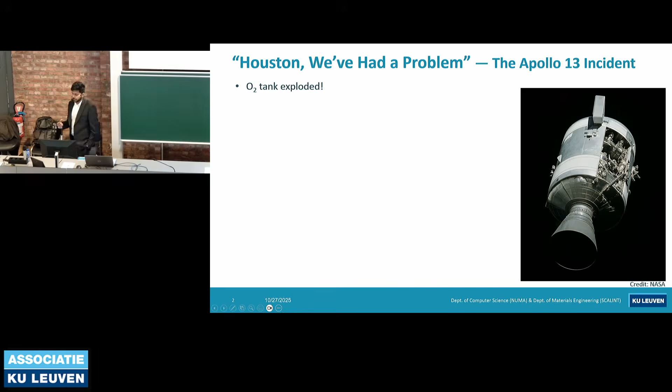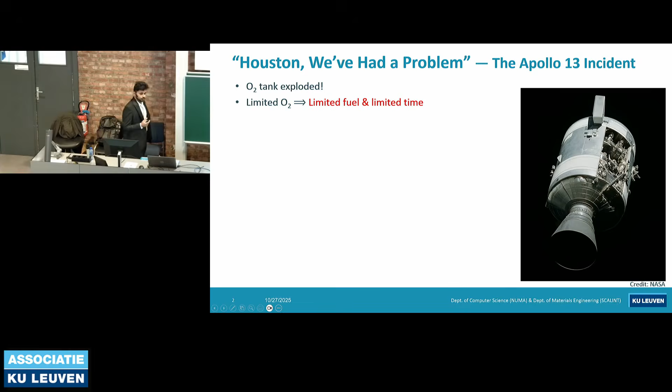You might be thinking that oxygen is quite important in the spacecraft for breathing, but in this case, it was used for breathing as well as to fuel the fuel cells which powered the electrical systems. So in no time, the spaceship, which was almost preparing its landing on the lunar surface, was now a stranded, damaged vehicle in space with limited oxygen, which meant limited fuel and also limited time. The astronauts had to carefully choose a maneuver so that they could abort the mission and go back to Earth. And they had to do it very judiciously because they had limited resources.

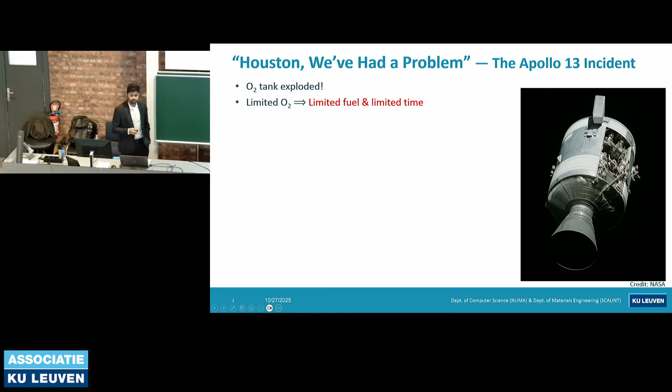With these simulators, they tried different scenarios and figured out a good maneuver that the astronauts could use to successfully get back to the orbit of the Earth and then come back home safely. What NASA did back then was quite remarkable. It was also one of the most significant demonstrations of what we nowadays call digital twins. While the term digital twin did not exist when this incident happened, the idea was already there.

The three key components we can identify there are the spacecraft, which forms the real system, the simulators on Earth, which form the virtual replica, and the continuous communication between mission control and the spacecraft through telemetry. So we also try to apply the same concept, but in a different context. Not to bring stranded astronauts home, but to understand and model material behavior.

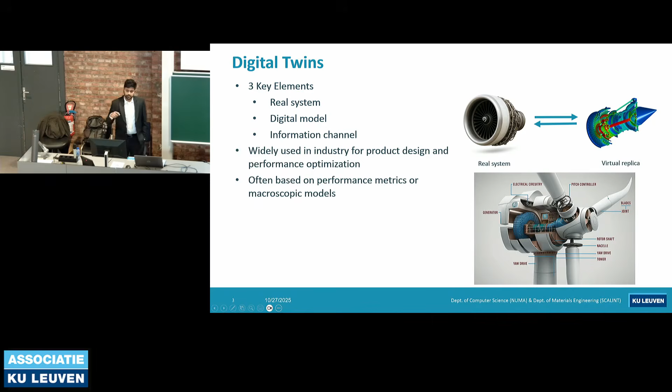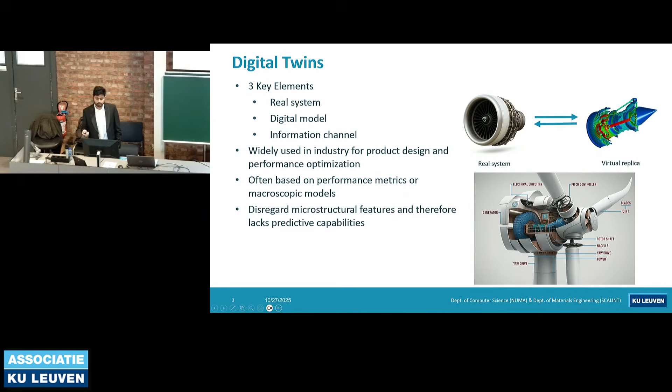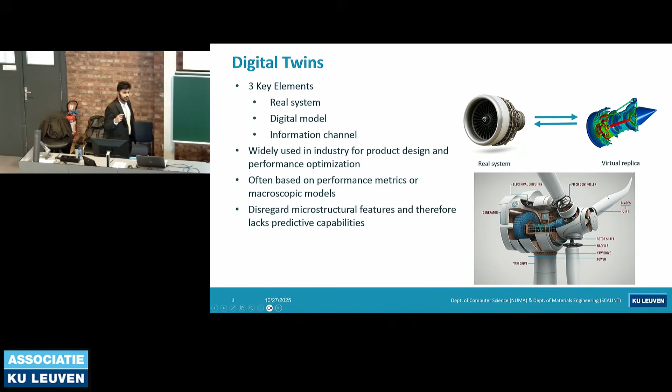Digital twins can also be used as a complement to experimental data. They cannot replace it, but they can act as a complement. So digital twins are quite important, but there is a problem here. These digital twins are usually based on macroscopic models or on performance metrics, which are quite empirical. They often disregard microstructural features, and because of that, they lack predictive capabilities. My thesis aims to include mesoscale modeling strategies in multi-scale simulation so that the hierarchical nature of material is captured in these digital twins.

What I mean by the hierarchical nature of material behavior is: let's consider a turbine system, which is a system of maybe thousands of components. If we isolate one component, such as a turbine blade, it is made up of several substructural, microstructural features. Instead of further zooming in, let's take the other way around. We all learned that matter is fundamentally made up of atoms. Atoms have a nucleus and an electron cloud revolving around it. In crystalline matter, these atoms don't sit at random locations, but organize in a very structured way.

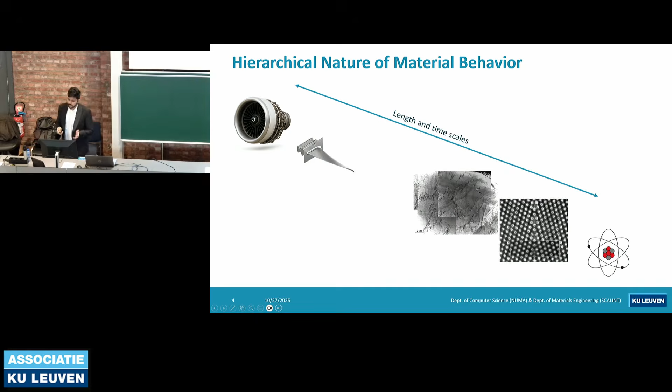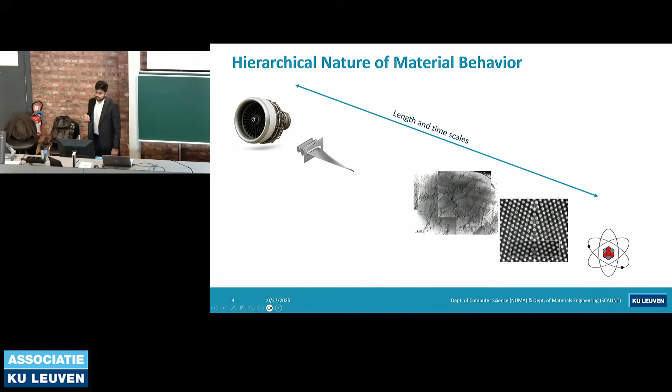For example, if you have a molten metal and you solidify it, these atoms start stacking together in an organized way at a nucleation point. The condition at one nucleation point is different from another, which is why you can see a boundary here between the two crystals. These are called grain boundaries, and the regions between grain boundaries are grains. The stacking of atoms is usually not flawless, which is why you have defects. These defects, especially dislocations at microscale, form the fundamental mechanism of deformation. If these defects were not present, metals would not deform but simply shatter like glass.

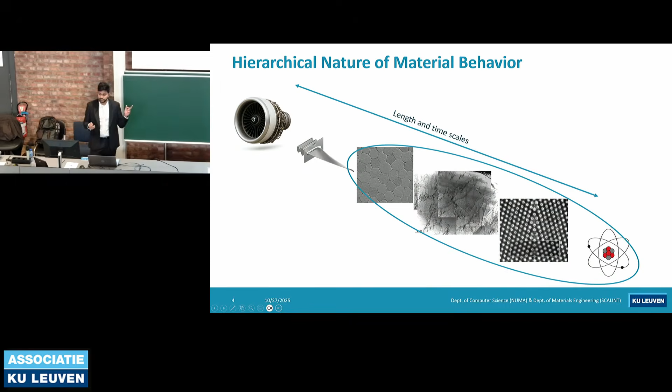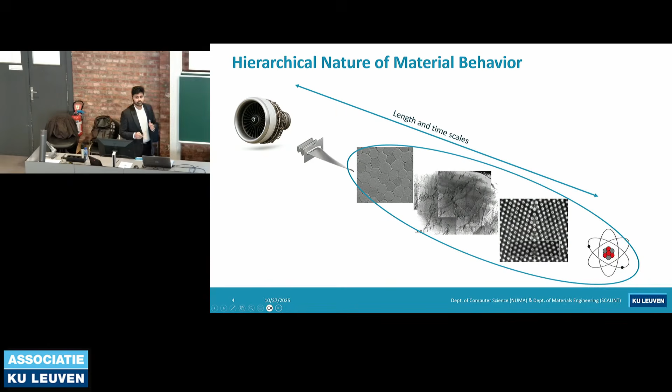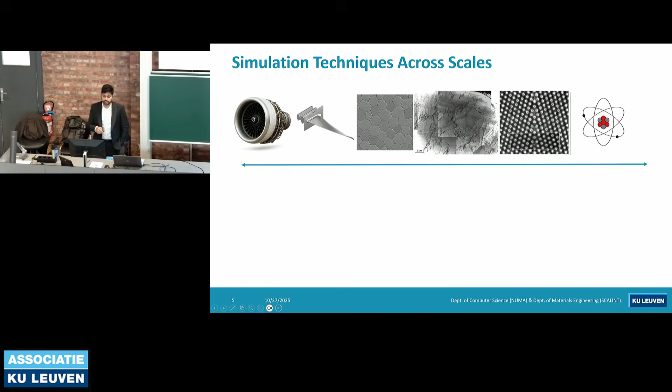These individual grains together form the polycrystalline structure of a turbine blade that you can see here. So when we speak about the mechanical properties of a turbine blade, we are actually referring to the incredible hierarchy of microstructural features that we see here. Since different features are seen at different scales, different simulation techniques are involved to simulate their effects. At macro scale, you have multi-body dynamic simulation, which considers the connection between different components. For a single component, we have macroscopic plasticity simulations, based on yield functions and plasticity theories.

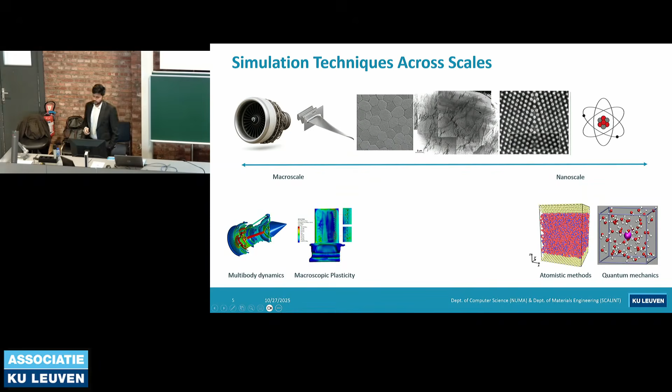On the other end, where the electronic structure of the material is considered, we have quantum mechanics simulations, then Newtonian mechanics, which do not consider the electronic structure, and discrete dislocation dynamics simulation at microscale, which only considers dislocations and their impact on hardening. Clearly, the simulation techniques on this end are quite practically applicable, and they can reproduce the realistic boundary conditions seen at a component level. But they lack predictive capabilities because they ignore the microstructural features.

The simulations on this end are quite physically grounded, so they are quite accurate, but they struggle to extend to larger volumes or be practically applicable. What comes nicely and ideally in between here is mesoscale. Mesoscale simulations act as a bridge between the macro scale and micro scale. They try to capture the physical detail from the lower-end simulations and also be practically applicable for macro scale simulations. In this family of simulations for material deformation, crystal plasticity is one of the important simulation techniques.

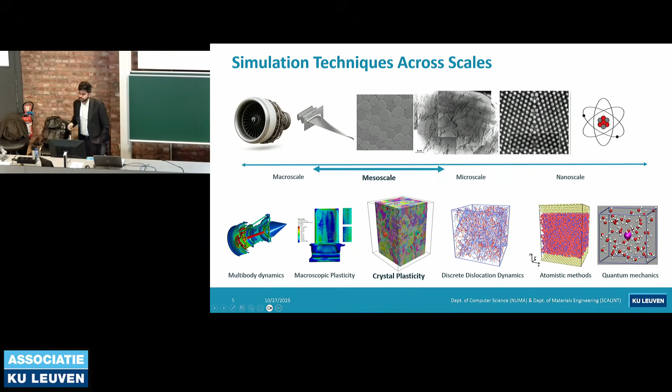So as I said, mesoscale connects macro and micro worlds, and it also acts as a perfect middle ground, but it also comes with many challenges. So it not just inherits the best of both worlds, but also the worst.

I'll explain why. Because at very small scale, you have first principle simulations, which are physically quite grounded, but to set up a simulation, you need a very small number of input parameters, such as fundamental parameters like atomic mass, electronic structure, etc. Similarly, on the higher scale, you have homogenized macroscale models which use a yield function. There again, it's quite empirical, but the number of parameters required to set up these simulations is quite small as

well. But the problem is, since mesoscale acts as scale bridging, the number of parameters required to set up these simulations is quite high. And because the number of parameters to describe the material is quite high, it's challenging to identify them from the simulations, and also challenging to calibrate these parameters uniquely. So with so much promise, the challenges at the mesoscale are also quite high. And this is exactly what my thesis tries to address.

So the aim of this thesis is to assess and refine the currently existing micromechanical modeling strategies in order to enable high fidelity digital twins of polycrystalline materials. So in very simple words, the goal is to make our simulations behave more like the materials themselves. And since the overarching objective is quite general, it is made operational by formulating research questions which are actionable, and these are based on targeted test cases.

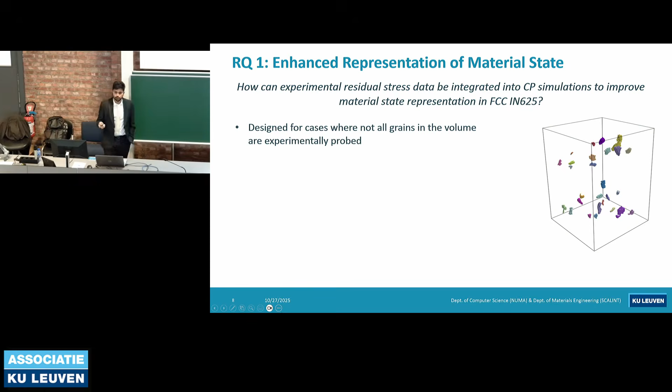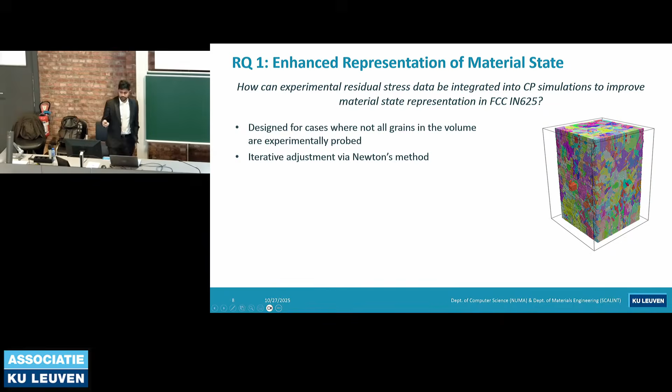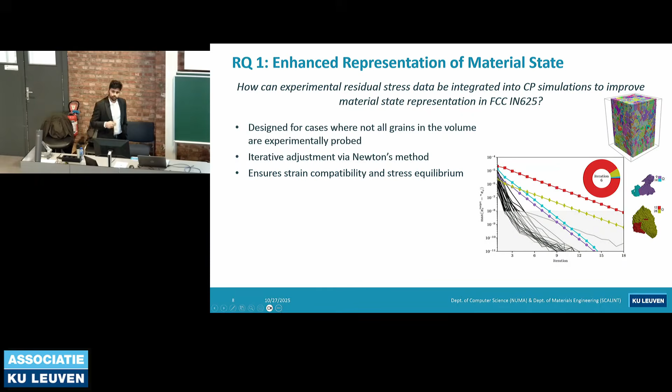A microstructure that was characterized from experiment was used, and this method is designed particularly for the case where you only have residual stress data for a small subset of grains. But this doesn't stop it from being used where the entire volume is characterized for residual stresses. The initialization of residual stresses was made in the volume iteratively through Newton's method. As you can see here, the error on the y-axis decreases as the number of iterations increases, which shows that the residual stresses converge to the reference value that we provide. This method also ensures strain compatibility and stress equilibrium, and also captures intragranular variation of stress and strain.

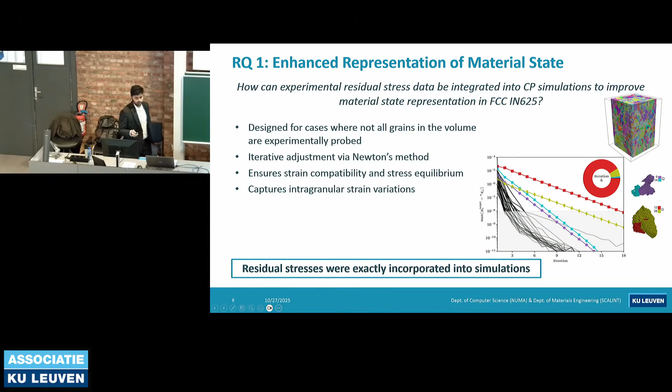So in conclusion, this method helps us to initialize residual stresses extracted from the experiment exactly into the simulations. Through this, it helps to improve the physical realism of our models.

Next, again drawing a parallel to the first story, when they got to know that the spacecraft was damaged, they used these two simulators that you previously saw in the picture. But these were not the only two simulators ever built by them. Even before the launch, they had built many different simulators which differ from each other in complexity and the level of detail that they captured. They tested all the simulators, got to know the strengths and weaknesses, and then decided based on application which simulator is best, and these were considered the final ones.

Similarly, in modeling, we have a myriad of constitutive models, also differing in the level of detail that they capture. But there's a trade-off between the level of physical detail that you need and the operational efficiency of the model. Typically when experimental data is scarce, operational efficiency becomes quite important. So this question addresses assessment of these constitutive models and asks how do different crystal plasticity models compare in reproducing mesoscale responses when benchmarked against experimental data.

For this, I used two types of crystal plasticity model. One, dislocation density based, which is a physics based model that captures detail of the dislocation structure, and the other one being a phenomenological model.

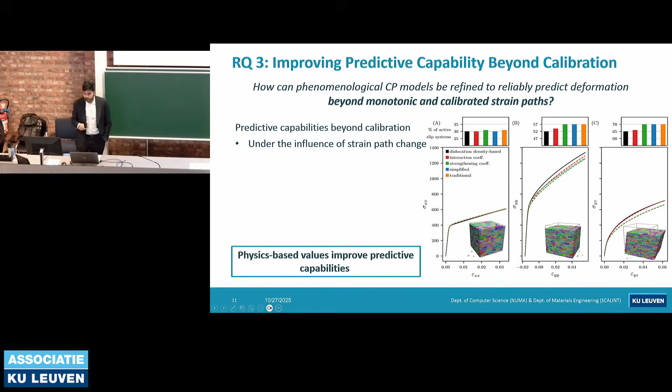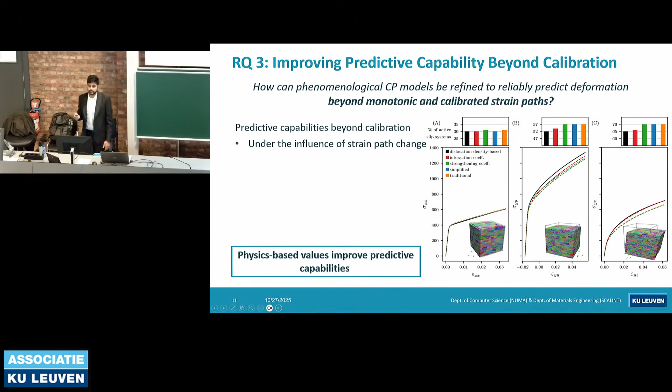Now, activating even more slip systems with the help of a shear loading cascaded on this. Here we activate about 65% of the total active slip systems, and here we also see that the interaction coefficient yields better response in comparison to the traditional. So we compared it against multiple fronts, one within the data domain of calibration and even outside, and we saw that the physics-based parameterization with the values obtained from lower scale simulations yields better results and therefore also demonstrates predictive capabilities.

Next, multi-level calibration. So here the question was how to reliably identify material parameters for a complex deformation system such as hexagonal close-packed titanium, not just with the help of macro or mesoscale, but with the help of macro and mesoscale data. Since mesoscale models try to act as a bridge between macro and micro worlds, for the calibration you need data not just from one side, but from both sides. So here we have a multi-level calibration, which is across the scale. I want to just show you why this is important.

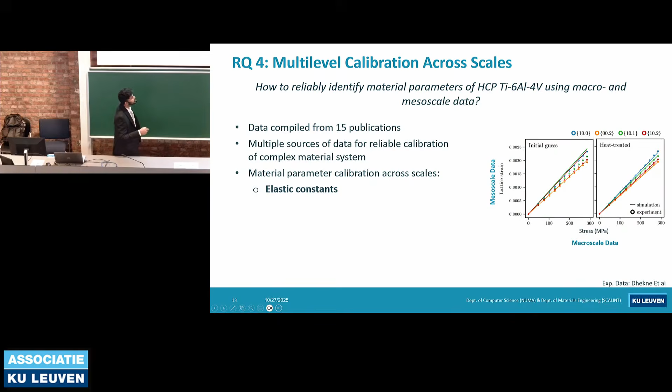So I just wanted to show that we have mesoscale data, macro scale data and experimental data which are scattered, and then, using an optimization algorithm, we fit the data and obtain elastic constants. And similarly, for plastic response, we fit the model not just at macro scale, but with the mesoscale and macro scale data set. With these reliable parameters, we also performed validation studies. So what we obtained is reliable parameters for hexagonal close-packed titanium via multi-scale calibration.

Now, using these reliable parameters, we can actually look at the trends that we see in the experiments, whether they would translate to just a correlation, or is there a cause for seeing those trends. So the last research question asked, how can reliably calibrated models be employed to establish causal linkage between micro-textured regions, which are seen in titanium, and residual stresses in Ti64 alloy?

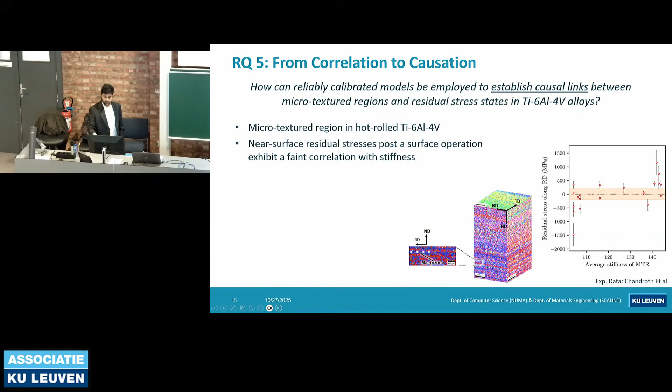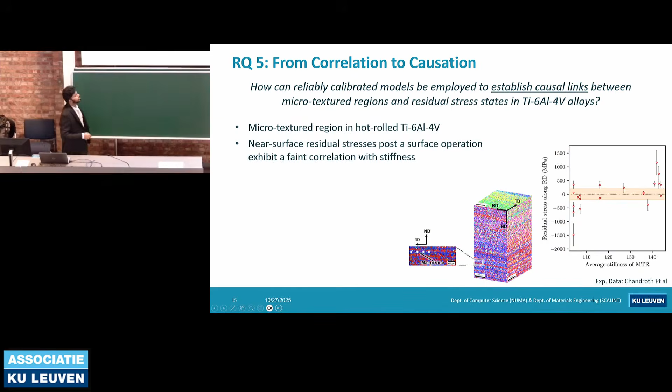It is often seen in titanium that after hot rolling, it has micro-textured regions of elastically stiff and elastically compliant grains, as you could see here. And it was seen that after a machining operation, the residual stresses generated had a hint of correlation with the stiffness of these zones. We cannot statistically say anything about this, but it gives us a hint that there might be a correlation between the stiffness and the residual stresses.

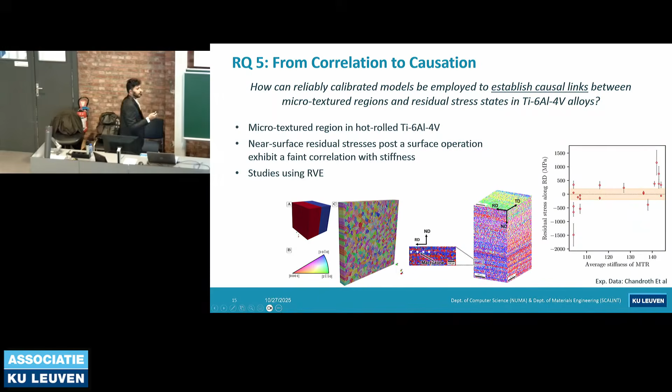For this, we used the reliable parameters identified from the last research question to study with the help of simple RVEs that you could see here. And from the simulation, we were able to reproduce the correlation that was seen in the experiment. Just to show you, juxtaposing: the correlation seen in the experiment and from the simulation. But still, there are outliers. And these outliers hint at not just elastic constants, but also other contributions to this correlation.

And it was seen that it was not just the elastic properties, but also plastic properties which affect the trend of data that we see. And these two are, of course, dependent on the orientation. So orientation plays a major part here and has an influence on residual stresses. Through this study, we were able to mechanistically understand what was causing such a correlation seen in the experiment. And thereby, we were able to bridge a microstructure property relationship.

So with that, I am at the conclusion of my presentation. So at the beginning of this presentation, we started with a very simple idea. The idea is, to achieve reliable decision making, we need to have a digital twin which is closely mirroring the actual state and actual reality.

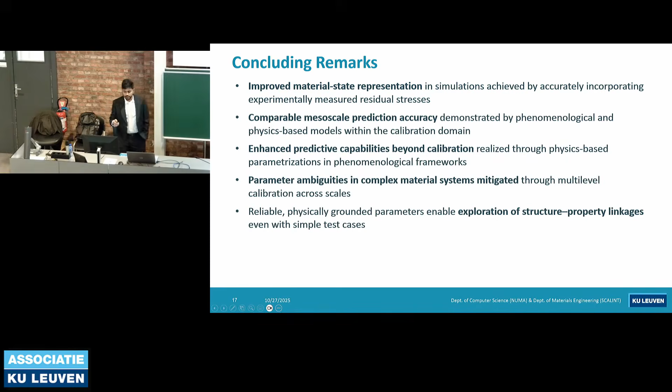And with these reliable parameters, we were able to perform a structure property linkage even with the simple RVE cases that we just saw. So together, these advances improve the mesoscale modeling strategies and also lay a foundation for high fidelity digital twins of polycrystals. So I have one more slide for the future directions, but I'll save it for later when we have interactive discussions. So with that, I'm at the end of my presentation. I thank you for your attention.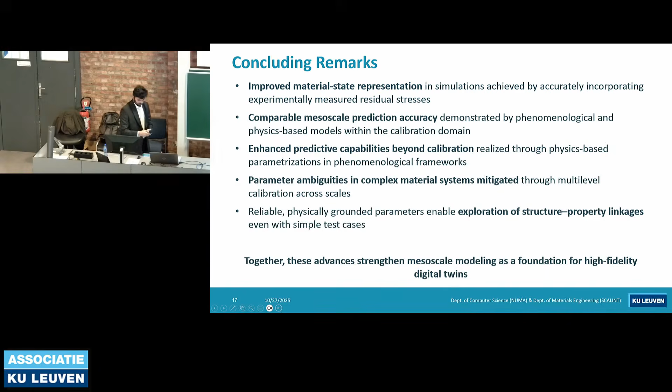Okay, thank you, Nikhil, for giving a nice presentation, telling the story of your doctoral journey. Now we go to the second part of the defense, which is the questions by the examination board and the audience. First of all, I will introduce the members of the examination board, and I will do that in the order that they will ask the questions.

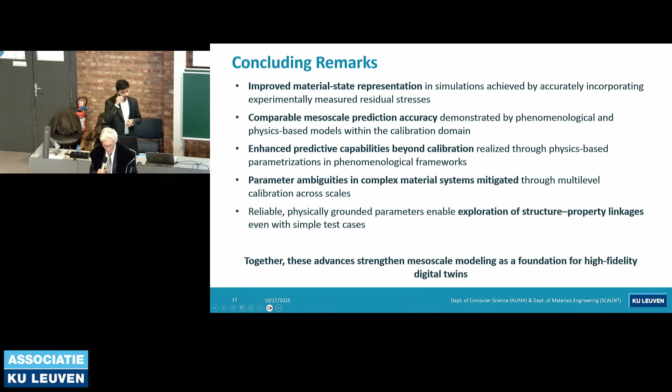Okay, finally, my name is Joris de Schutter. I'm from the Department of Mechanical Engineering, so I'm not an expert in the field. I'm just chairing this session on behalf of the Faculty of Engineering Science. So let's say Master of Ceremony. So I invite the first member to ask his questions.

Thank you. First of all, thanks for a clear presentation and putting your work in such an elaborate framework. I think we could all learn a lot from that. I have a question concerning your term high fidelity twin. So how could you judge or assess the fidelity or the quality of a digital twin?

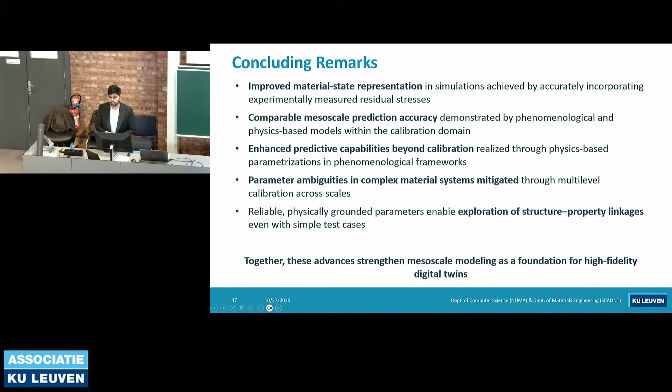So you did it through the RVEs, in fact, then? Yeah, for the last case, it was... So you assume your material is behaving similarly everywhere, then? Yes. But can you imagine that there are maybe certain macroscopic processes where that would not work? And how would you do the...

In that case, we used two different RVEs. One was a bicrystal, which corresponded to the ideal scenario of having two microtexture regions right next to each other, and this was infinite because it's an RVE. And then to add complexity to it, because we also saw that at other regions it was not only lamellas, but also other intermediate orientations were involved, we increased the complexity by having a random polycrystal.

So this is not the end. We can again increase the complexity and make it more representative of the actual state. Okay. Thank you.

Then another question, maybe more general. I assume you need a lot of compute power to do your simulations. Probably you also need a lot of memory, and a lot of data. What is the key bottleneck for your simulations of these three? I think in the optimization I really faced computational challenges. For the optimization we used a Nelder-Mead method, and for every run it has to calculate the lattice strain of all the grains, and then we throw away most of the data and use it only for the specific orientations that we are interested in.

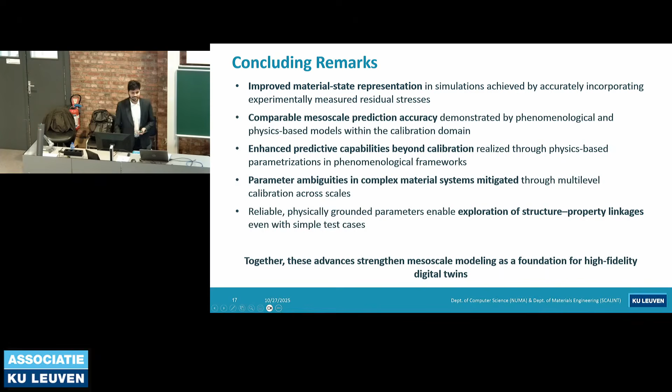Okay. Yeah, okay. Accidentally, it was in the wrong position.

Good. So in the conclusions of your chapter 4, you suggest to incorporate relative interaction strengthening ratios identified through lower length scale simulations or, where possible, latent hardening experiments. Yeah? And then I was a bit wondering how you would tackle this issue. So what would you model exactly, and which kind of latent hardening experiments are you thinking of?

So these latent hardening experiments were initially used in the 1960s or 70s. So what they tried to do was first apply load in one system so that the other slip system is hardened enough latently, and then they used a different orientation of the sample and then loaded this latent hardened system. And then you would see how much it has already hardened. So from that, you could infer from the hardening of one slip system and the geometric relation between them by what factor it has hardened more because of it being simply latent.

That experiment was used 4 or 5 decades ago, but I'm not sure if people nowadays use these experiments to really identify latent hardening parameters, because it's quite difficult, first of all, to load and specifically target the slip system that you are interested in. And especially when you have complex material, it gets even more complicated. So I just did not want to rule out the possibility of latent hardening experiments entirely. That is why I mentioned, if possible, with latent hardening experiments.

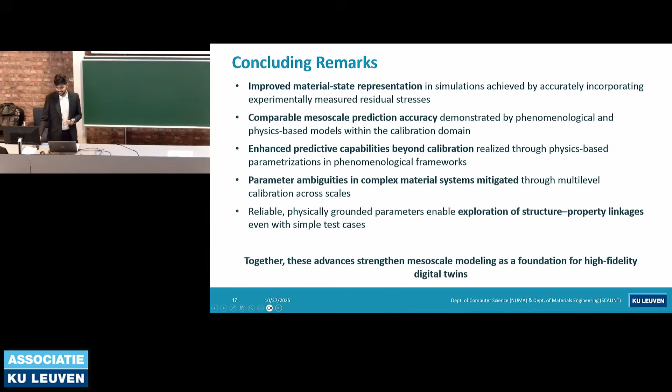Nikhil, normally the chair doesn't ask a question, especially since I'm from another field, but you teased us because you said you had presented some slides about your future work, a structured overview. Okay. While some of these points may have come across during the discussion, I would still like to invite you to present to us and the audience this overview of future directions.

Okay, thank you. So the first direction which could extend this research would be what is really important in mesoscale modeling, as we saw, is data-rich experiments. Because when we calibrate, we cannot just have data from one single scale. So we need data across the scales. And for that, these data-rich experiments are really the way forward.

And then another important point that we just discussed is one needs to enhance the visibility of this data. Not just the processed one; it's a couple of TBs, but the raw data should also be made public. Then somebody who is interested in this work, or somebody who finds that it's not really adding up, can really look into this raw data and see why it's processed in the way it is processed.

And either one could identify that there's a bug in the post-processing, or it would lead to a better understanding of mechanisms. It could be that our model is simply not able to capture the mechanism that is there in the experiment. So either way, it would be good for the scientific community if it's open.

And then, I think this we have also covered, that having physically meaningful parameters is quite important. The number of parameters is not that important, but really calibrating them based on what we see and with physically bounded values, that is quite important. And improved, okay, this one I don't think I have covered.

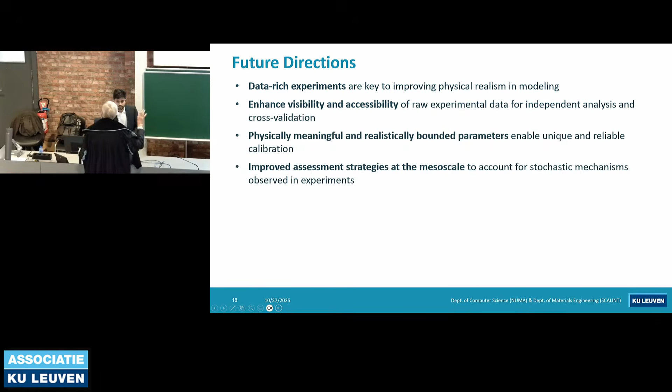Can you show the Teams meeting, to see if there might be questions from online? I don't have an online one. I just have a live stream.

Okay. Ladies and gentlemen, as I announced earlier, the Faculty of Engineering Science pays a lot of attention to interaction with the public during this defense. So I would like to invite you. I heard online is only streaming, they cannot ask questions, but I invite you here present in the room, if you have a question, to ask it or give a comment on the work of Nikhil. Yeah.

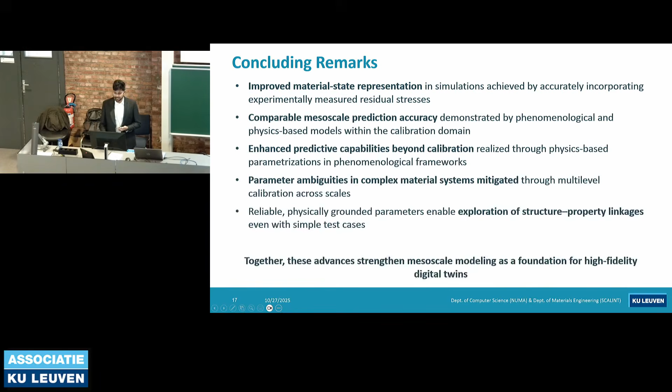these grains. But then we had to use an equilibration, and this had to be done iteratively because there are surrounding grains. If you initialize it in just these grains, then it would be incompatible and the volume would not be in equilibrium. So we had to equilibrate it so that we iteratively achieve the experimentally characterized residual stresses in these 28 grains. But the surrounding grains now all have a residual stress because of accommodation of these residual stresses in these grains. Okay. Thank you.

Is there any other question or comment? If not, then the examination board will now withdraw to make their final decision. Don't run away, we won't take long, and we will be back for the graduation ceremony. Thank you.